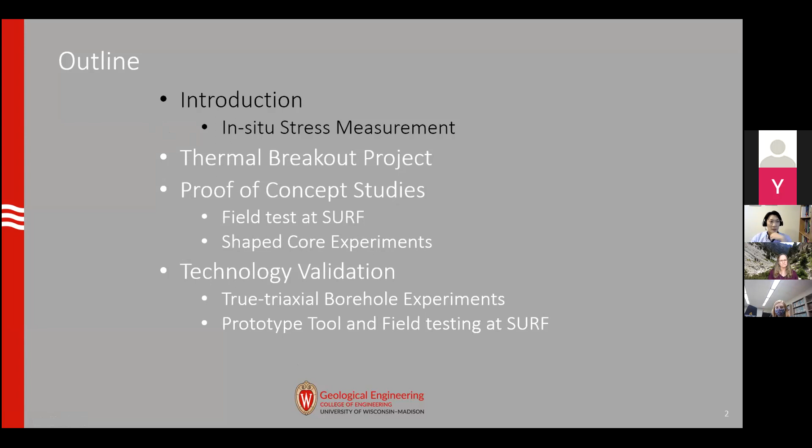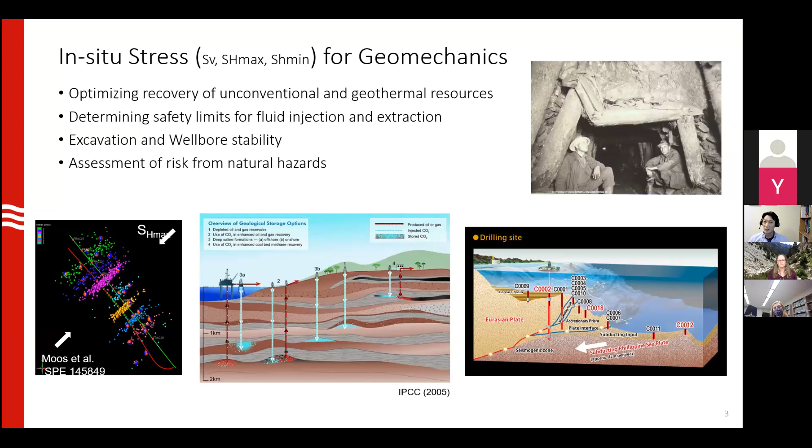Okay, so first, talking about why we care about in-situ stress. I think probably for many of you it's familiar, but just to make sure we're on the same page, understanding in-situ stress is of course very important for geomechanics. If we want to optimize recovery from unconventionals or geothermal, we need to understand when microseismicities or faulting happens and the associated dilatancy. We also need to, if we're trying to store fluids in the earth, like carbon or nuclear waste, understand to what extent we can keep injecting, and that's also governed by stress.

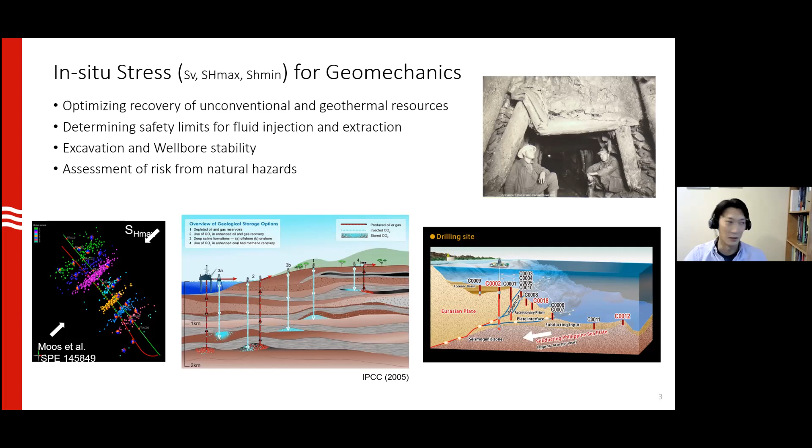More on the shallower side, here's just an example of an interesting photo I found that demonstrates mine stability as an issue. Obviously this one is, well, they're pretty relaxed considering how severe the situation is. But if you want to predict these, you also need to know stress. Also from the larger scale earth science story, we need to understand stress to understand earthquakes that pose hazard risk to us.

So how have we measured stress in the earth? There's many technologies that we've been using. On the left is representing the more geotechnical engineering side, in this list of techniques. For instance, people have put flat jacks in rocks, slots that they cut into the rock.

What they do is they pressurize the rock until they deform back the rock into its original state. Or overcoring is a method where you attach strain gauges or deformation sensors to a rock, and then release the stress surrounding the rock mass, measuring the associated deformation to understand what the stress used to be. So these are all displacement-based measurements to back out the stress. These are kind of limited in the distance that you can achieve.

I'm not sure if you guys see my mouse. Do you see my mouse? Oh okay good. Yeah, so these are kind of limited in the depth range that they can achieve.

So more typical in boreholes that can reach greater depth, people tend to also use hydraulic fracturing. Hydraulic fracturing is a method where you keep injecting water until the rock fractures against the minimum principal stress. You cycle the pressure many times to observe the opening and closing of the fracture in order to understand what pressure was necessary to open these fractures. So that becomes the most direct measurement method we currently have.

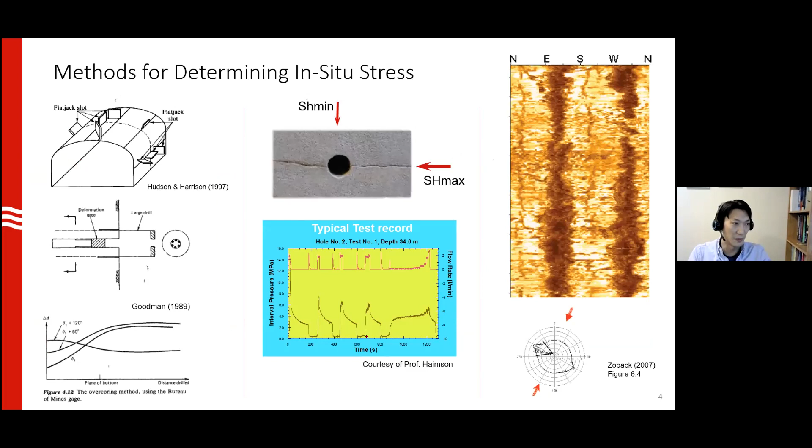The advantage of this technology is that if you combine it with hydraulic fracturing, theoretically you can determine the complete stress tensor. Also, this imaging can be done in deep boreholes, so while civil engineering methods on the left were limited to proximity of excavation, you can access much deeper depths, which is of interest to geological engineering. You can also utilize the width of the breakouts to uniquely define the horizontal stress magnitude.

But there is a limitation to this: breakouts and drilling-induced tensile fractures don't always form. I forgot to mention, but sometimes this sinusoidal pattern can also go down into tension. This is where the breakouts form, whereas if the stress condition is right, you can also create tensile fractures that look like this.

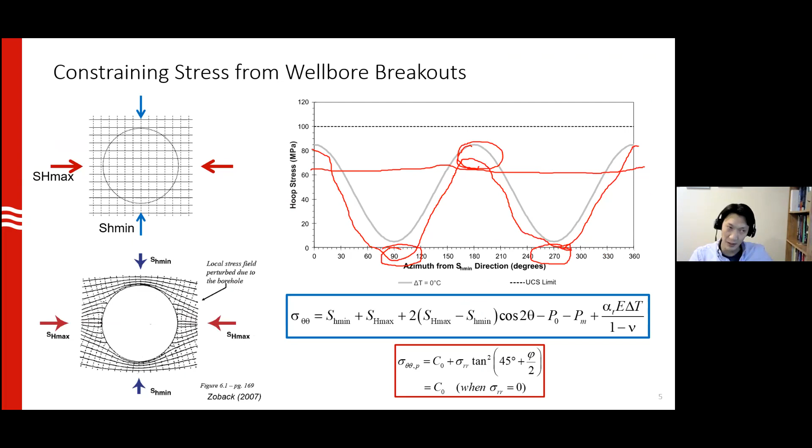We won't focus on that today, but the important thing to note is that you have to have the right stress magnitude - the stress has to be high enough, and also the rock strength has to be low enough, in order to create these features so you can analyze stress. But if the condition isn't right, if the stress is too small and the rock too strong, you won't get these features, as you can see in the middle or bottom section, so you won't get any information about stress.

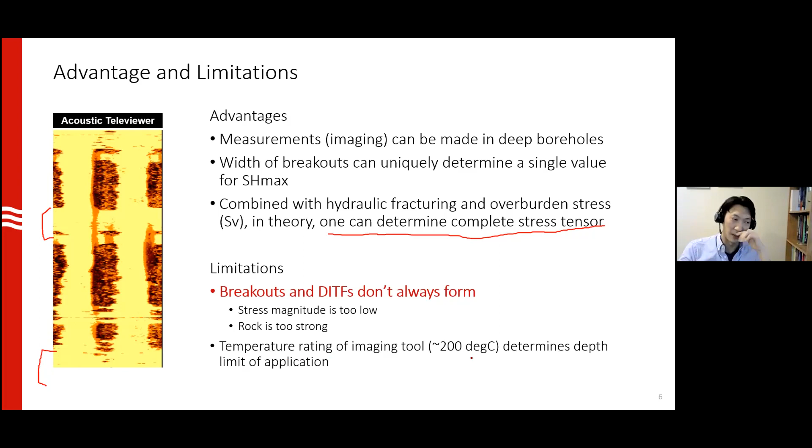The proposed technology aims to overcome these limitations. I also note that these imaging tools have a limited temperature range, which also determines the maximum depth you can do this kind of analysis. So what is the thermal breakout project?

This essentially started from our partner RESPEC's previous project, where they were trying to melt rocks using borehole tools in order to seal a borehole. This is a quite interesting idea. They were developing downhole tools to do in situ melting of rocks. They were successful melting the rock, but they also realized that the heating caused many fractures around the borehole, which you can kind of see by the rough edges here. I think the center portion is the molten rock, whereas the surrounding is the brittle fracture that formed around the borehole.

They noticed that heating induces a significant amount of thermal stress. This led to the idea that maybe you can use this, but for this project it had a detrimental effect because they were trying to seal the borehole, and instead they were introducing fractures around it. So now they thought about using this to intentionally create breakouts.

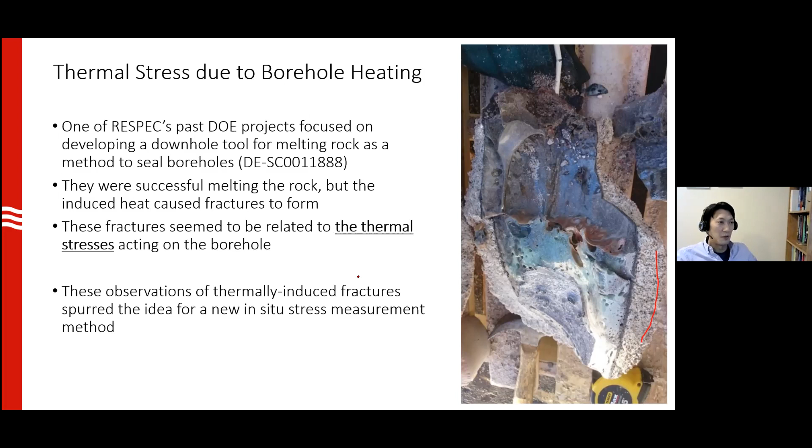So the way the concept works is fairly simple. For instance, the first gray line on the bottom may be the hoop stress variation around the borehole, which does not reach the rock strength. The rock strength limit is shown by this dashed line. But if you heat the borehole and create an additional hoop stress due to the thermoelastic stress, you can raise this entire sinusoidal curve so that the maximum hoop stress reaches this rock strength and therefore create breakouts.

This equation on the top right is the Kirsch solution, which applies for the maximum value of the hoop stress. As you can see, you can relate the amount of hoop stress you get with the amount of temperature, as long as you have the proper thermoelastic properties, elastic moduli, and Poisson's ratio. So this gives us an idea that if we can measure the delta T that is required to create this breakout, we can also back out what the stress magnitudes were that created this sinusoidal curve.

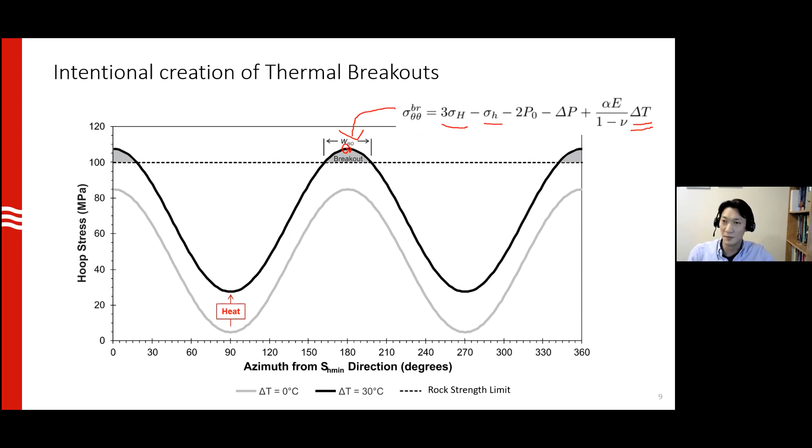I hope this makes sense. Fairly simple: if we don't see breakouts, why don't we cause them ourselves by heating the borehole?

So does this really work? In the project, we had some early experiments and field studies that tried to prove that this idea can work. First is the shaped core experiments, done by Seiji Nakagawa at Lawrence Berkeley National Lab. In this experiment they use a rock sample with a particular geometry with a narrowed center section. I'm sure this is similar to the dog bone shaped experiments you guys have also been doing in the past. But the reason why in this case they do this experiment is not to create tension, but actually intentionally create a stress concentration in the middle that is similar to the curvature of the borehole.

By loading axially, they can cause a simulated hoop stress at the side of the rock. What Seiji also did is they know they can load the rock until failure forms to simulate a breakout. This originally was done by Nakagawa, Ewy and Chevron, where they were trying to simulate a breakout failure by loading the sample axially. So what Seiji did is he loaded the sample, putting some axial stress, but not enough to create the breakout, and then spot heated the surface of the rock to simulate the thermal stress we are trying to create in a borehole.

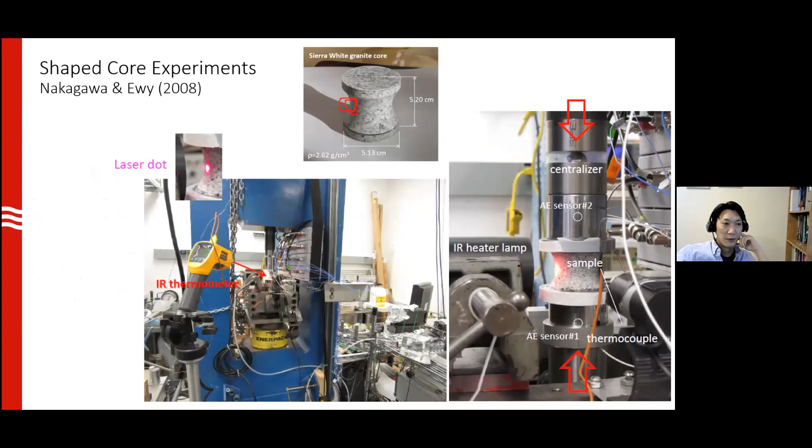He also has AE sensors embedded in the piston so they can monitor the activity. This is a summary of what happens in the experiment. Red shows the axial stress increased in steps, and the background red shading is the timing when heating by the infrared heater lamp is occurring. So basically increasing the axial stress is like increasing the hoop stress. What you can see is that when the axial stress is low, heating does not cause anything because you don't see any acoustic emission occurring.

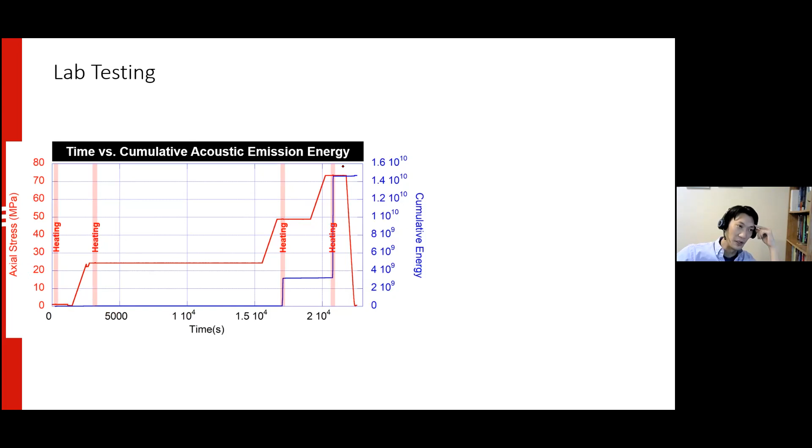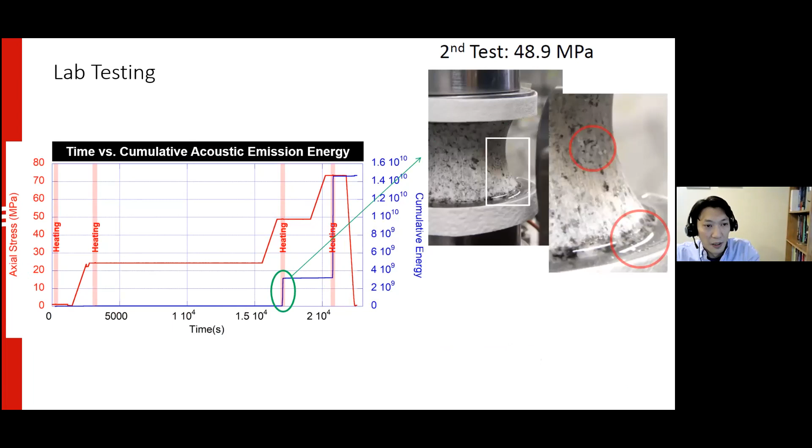But once the axial stress reaches a certain level, heating does cause failure analogous to a breakout and associated acoustic emission. In test 2, you can see this simulated breakout happening and spalling of rocks accumulating on the bottom. So what this proves is a proof of concept that heating-induced rock failure is a function of the background stress level. Identifying the amount of heating required to cause this becomes a measure of stress, or we can infer what the stress magnitude is. So occurrence of compressional failure due to heating is controlled by background stress.

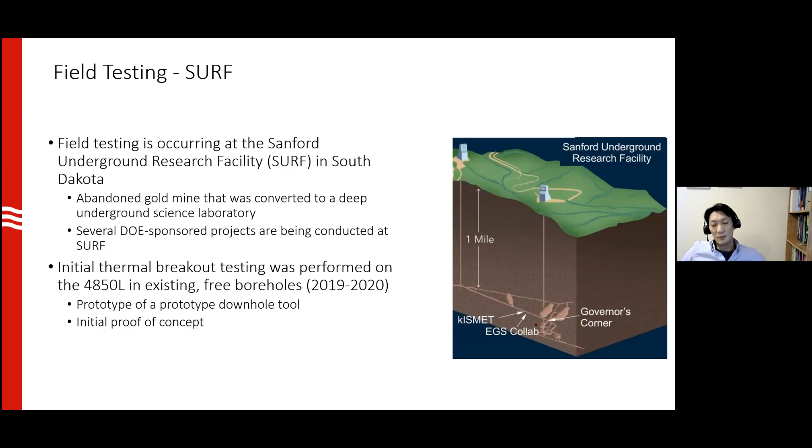So our colleagues at RESPEC also tried to do a proof of concept study in an underground laboratory, namely in Sanford Underground Research Facility. This is an abandoned gold mine that is now extensively used for many underground laboratory experiments. In recent years, there was a kISMET project that tried to do hydraulic fracturing in this mine, and right now there's an ongoing EGS Collab project, aimed at creating hydraulic fractures under in-situ conditions for geothermal energy studies.

So this is what the 3D structure looks like. You can see that it's quite extensive, and the region where they're doing the test is the orange spot you can see on the bottom.

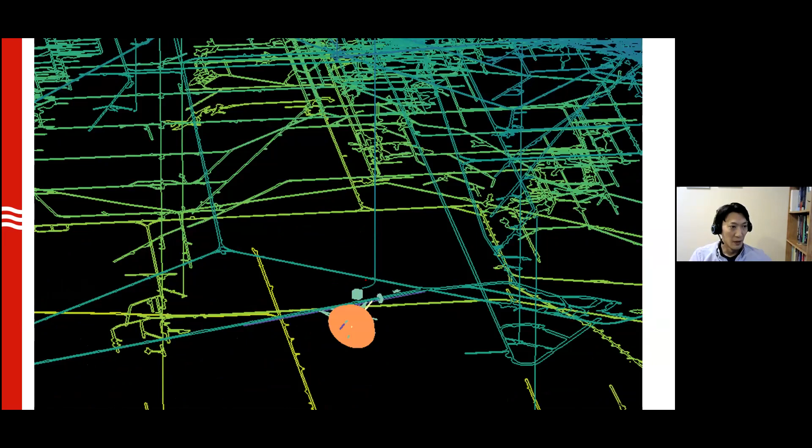And this is what the site looks like. The advantage of this location was that, some of you might remember, this is actually where the DUSEL project was proposed maybe 10 to 20 years ago. They were trying to create an underground laboratory there for geotechnical engineering, so there were actually boreholes already existing. We could take advantage of that and try to test the concept.

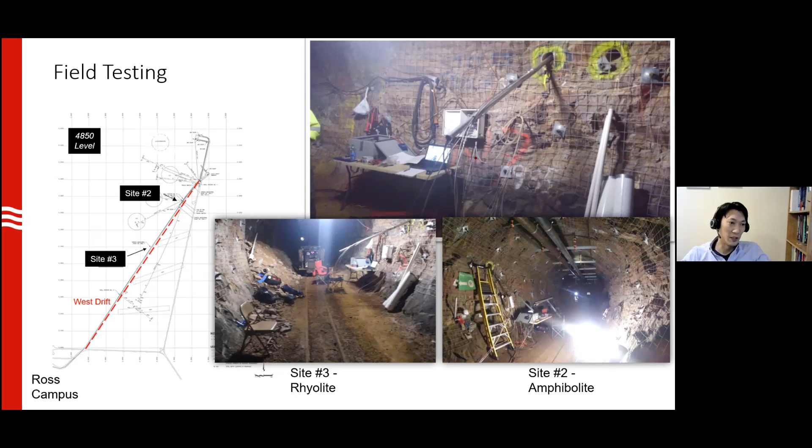So what the colleagues at RESPEC did, they call it a 'garage science tool,' and it's very simple. They just have a heater in the middle and several additional components to stabilize it, and they stick this in the borehole to see when the breakout occurs, and also monitor the temperature. The heater element temperature reaches about 1000 degrees, and then the radiation heats the rock, and the rock temperature is also rising slowly over time.

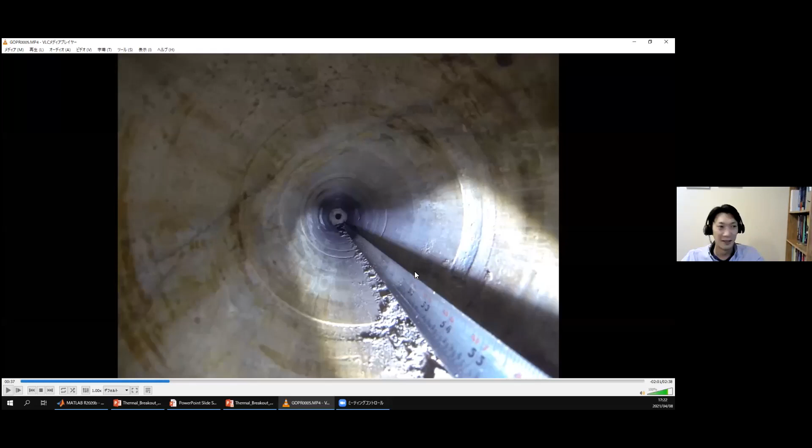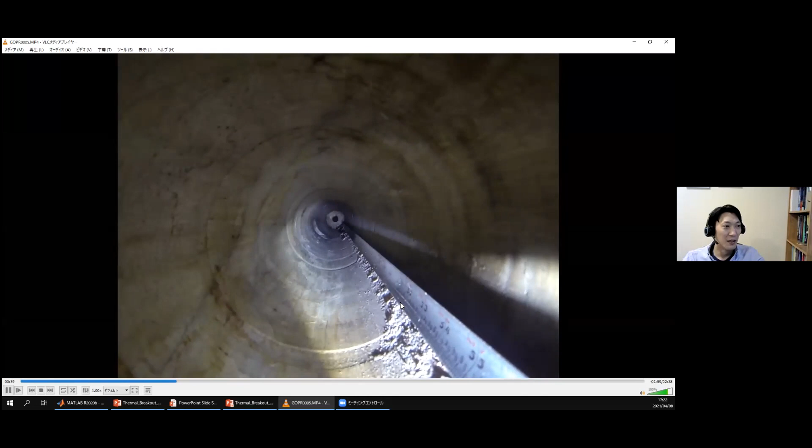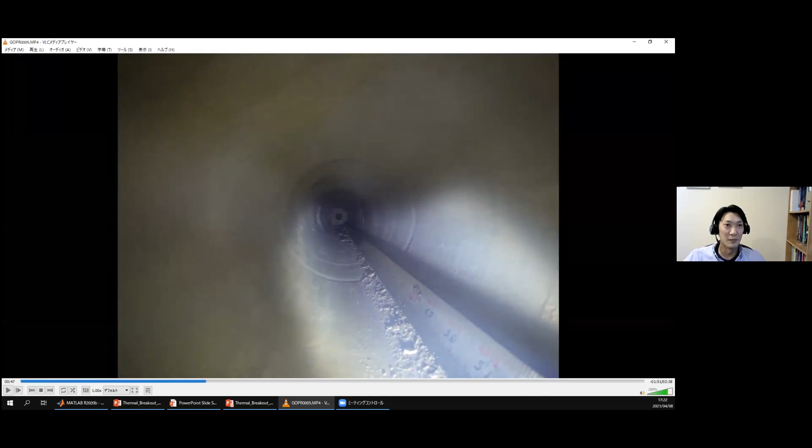But what you can see here is that on the side of the borehole it actually created a breakout. The stresses are... it's now rotating, and it becomes foggy, like this. But quite interesting. So this shows that this idea that thermally induced stress causes breakout does actually work.

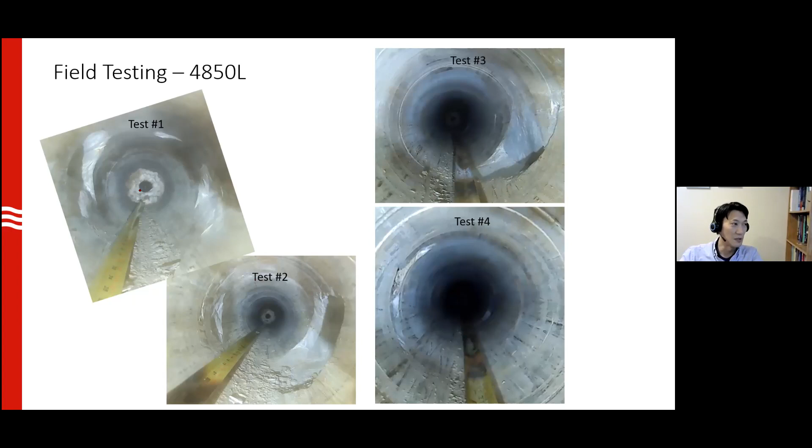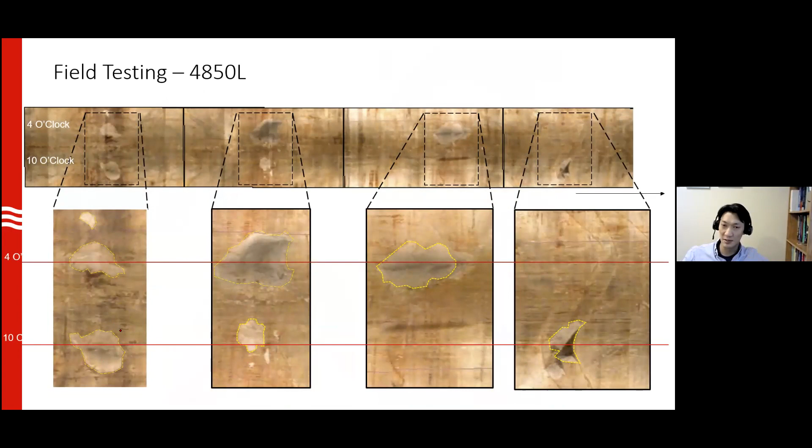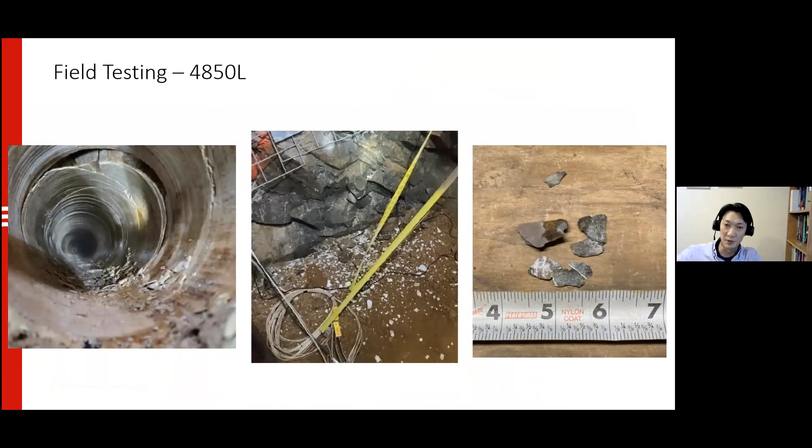So this is four locations that they tested. You can see diametrically opposing breakouts forming in the 4 o'clock and 10 o'clock direction. This means that these are indeed breakouts as we expect, as we see in typical boreholes. We can also see rock chips falling, similar to what is produced in boreholes where breakouts occur.

Okay, so now I want to get into some laboratory experiments that we actually did at UW-Madison. We proved that this can actually happen conceptually, it works. But whether we can use it as a stress measurement tool is a whole other story, because you have to achieve enough precision to call it a stress measurement tool. The experiment was carried out by our postdoc, Maciej Trzeciak.

The samples are quite big, 5.5 by 8-inch prisms, and we use Niagara dolomite and Berea sandstone to do these tests. We also have acoustic emission sensors embedded in the platen so we can hear the rocks break, and also in the heated tests, thermocouples are embedded so we can monitor the temperature.

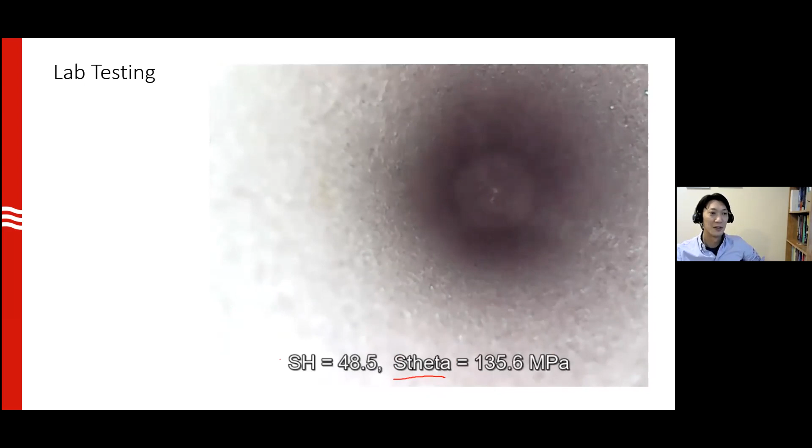It's supposed to happen pretty soon. You can already see rock fragments piling up on the bottom. Sorry, I don't have the timing memorized. Now you see a lot more falling down, and you can start to see the surface changing morphology due to the breakout formation.

All right. I don't see a progress bar where I can control this. I'm sorry, okay.

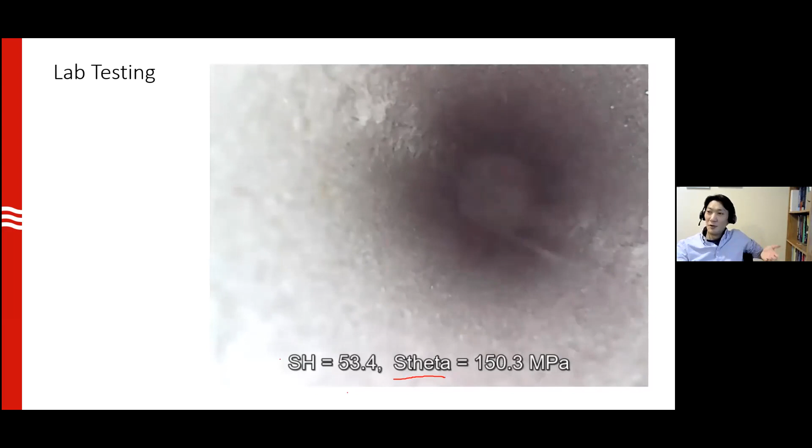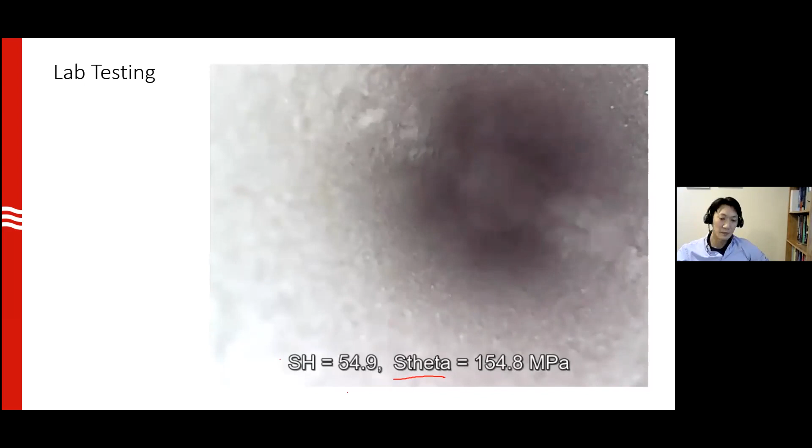So what you might notice is, when do you know the breakout happened? Because it's not like all of a sudden the whole thing collapses. It's quite subtle: you start by these grains plucking out, gradually the pieces get larger, and gradually you start to see this borehole surface changing. Sorry.

We had quite a bit of discussion on how to use acoustic emission to identify the onset of breakout. The acoustic emissions locate fairly nicely, as we expected. It forms where the breakout should happen.

I won't get into too much detail today, but essentially we noticed we can classify the acoustic emission into source types: C for compressive, S for shear, T for tensile events. It's really the onset of the tensile events, signifying the splitting open of the rock fragments, that corresponds with the onset of breakout.

I can talk about this more in detail if interested, but in essence, that is what we rely on right now to identify onset of breakout.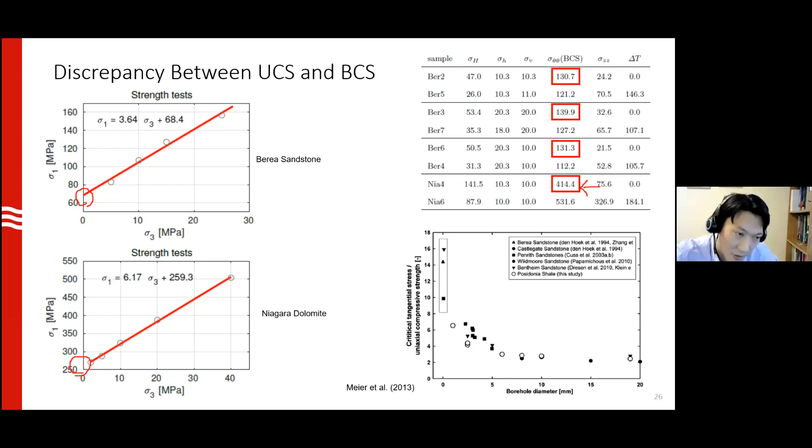It has been determined and understood that the strength of borehole walls becomes stronger as the borehole gets smaller. You can understand this as a typical size effect that's empirically known. Some have also tried to use fracture mechanics to explain this, but the essence is that even for boreholes that are 2 centimeters in diameter, the critical tangential stress—the hoop stress at failure divided by the uniaxial compressive strength—can reach about a factor of 2.

So we are not 100% comfortable with this discrepancy, but at least we can say this is a known effect, and we can understand that these numbers we recover from the experiments represent the strength of the borehole. We can apply this number when we do a heated experiment.

So how does a heated experiment work? Very much the same as the previous room temperature experiment, except that we don't keep increasing. Let me get rid of this zoom panel.

We don't keep increasing sigma h. We stop increasing it here, because we want to induce a breakout by heating rather than just external stress. So after we keep the maximum horizontal stress at a constant level, now we start heating the borehole, and this is the temperature data registered by the thermocouples we have.

So the summary from this lab testing is that phenomenologically, we are successful in creating this thermal breakout, and we have first order success in inferring what the far field SHmax magnitude is. But there are certainly effects that we are not totally comfortable with yet. One is the size effect, which we could only address empirically. And also the fact that this true triaxial criterion that we constrain from cylindrical samples does not really apply to the borehole geometry.

Applying true triaxial criterion to borehole, we're definitely not the first ones to do it. It's been studied for decades, but most of the time they use it in terms of identifying the safety limits in drilling, whereas we are actually trying to precisely determine the stress. And it turns out, I think it's fair to say that we don't have good enough knowledge about rock strength in order to make the reverse happen of estimating stress from borehole deformation.

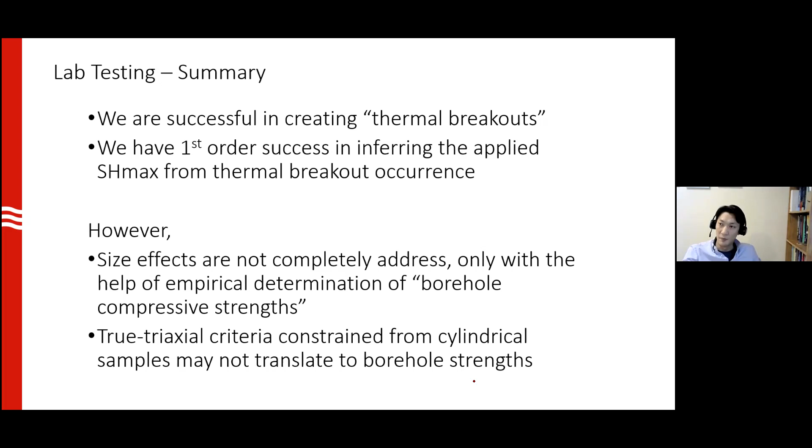Finally, I just want to mention some ongoing things. As I mentioned, we are in year 3 of the project. What our colleagues in RESPEC called the garage science tool actually works quite great in producing field thermal breakouts.

But we're actually also, with the help of Integrity In-situ, designing a prototype tool, which is a little bit more refined, with better temperature measurement, better temperature control capability, and also in-situ acoustic monitoring, so that we can identify the onset of breakout in the field. So that is designed and I think underway in construction.

And we hope to take this to the SURF Underground Laboratory again to test our concepts. Particularly, we're going to go to a little bit shallower level. The 4850 level is now occupied by the Fermilab, which is trying to shoot neutrinos from Chicago to South Dakota and detect it in the underground lab. So that's a major project going on there. So we are now kind of kicked out of the 4850 level, and we are at the 4100 level.

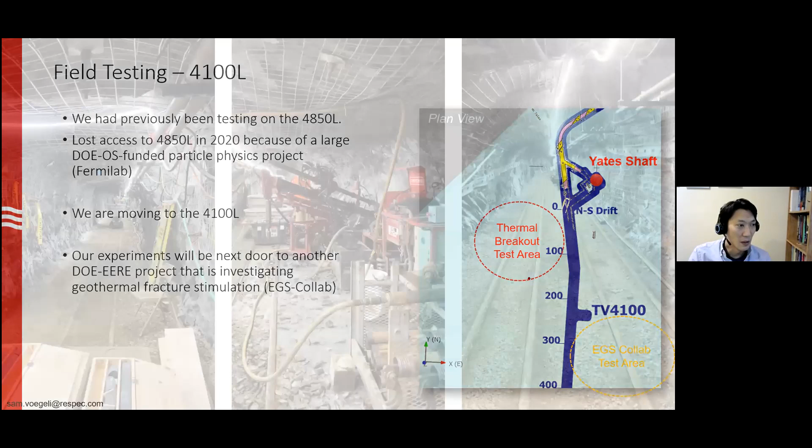It's a slightly more tight spacing, but the drilling equipment can still fit. So, whoops. Sorry, I didn't know that there was a movie here. Let me keep going.

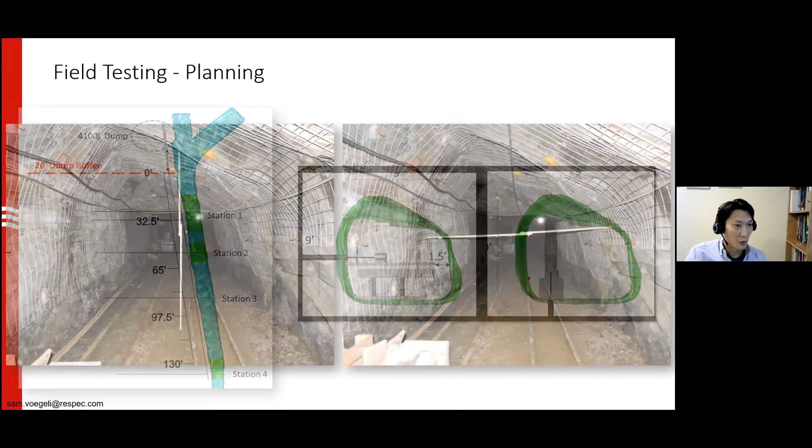But what we will be doing is drilling vertical and horizontal wells as well as a diagonal hole, because the borehole that's not oriented with the principal stress gives us some information about how the breakout occurrence tells us the ratio of the principal stresses. Probably shouldn't get into too much detail on that right now, but that's the activity that's going to take place hopefully within the next half year, I think, so we can test this method of creating thermal breakouts and inferring stress from this new field tool.

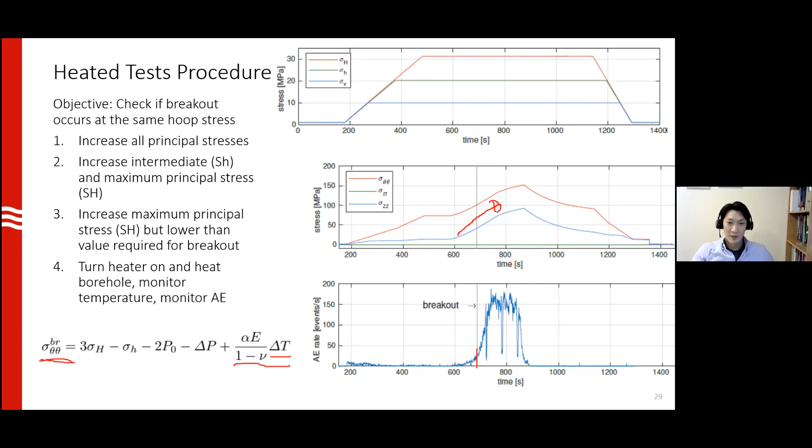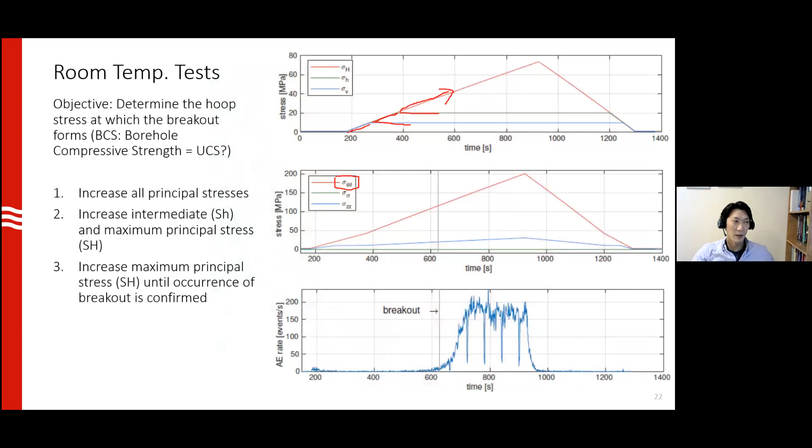Yes, I didn't explain that, you're right. Well, it was basically a nichrome heater element, where you just apply voltage. We just put this heater inside the borehole and apply a constant voltage, and the temperature of the heater increases, and then the radiation also increases. So most of the heating is done by radiation, actually.

Okay, yeah, okay. And I had some question, but okay, no, I think that's the main question. And then I had some question about the stage's result - I was just a little confused, but I think you have acoustic emission only during the heating time, am I right?

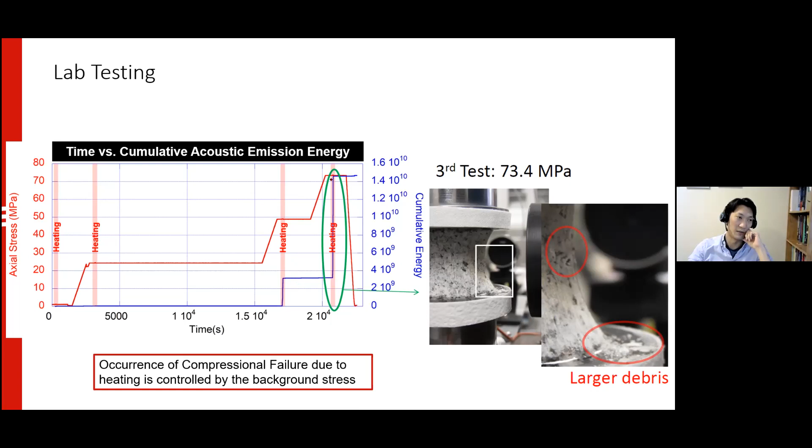Now I understand that. So another thing - yes, I don't remember if he has... well, I think he has the temperature measurement too. And most likely the second time he sees acoustic emission, that occurs at a lower temperature, I think. That's not expressed in this graph, but yeah.

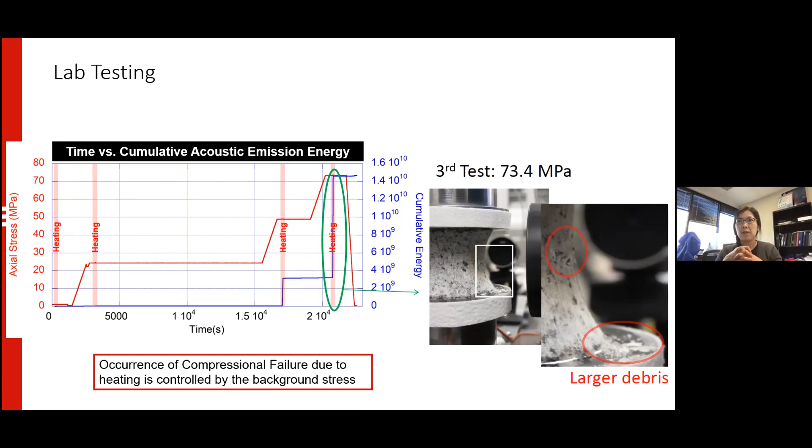Now I remember my second question about your lab settings. So your measurement of the horizontal stress, or you have basically the polyaxial applied load - so once you start heating up, are you still trying to keep the load constant? Yes, it's stress controlled. So basically the macroscopic stress is constant. Yes, I forgot to mention, but there's a servo intensifier on the backside around here, and that's controlling the stresses constant. All right, thanks.

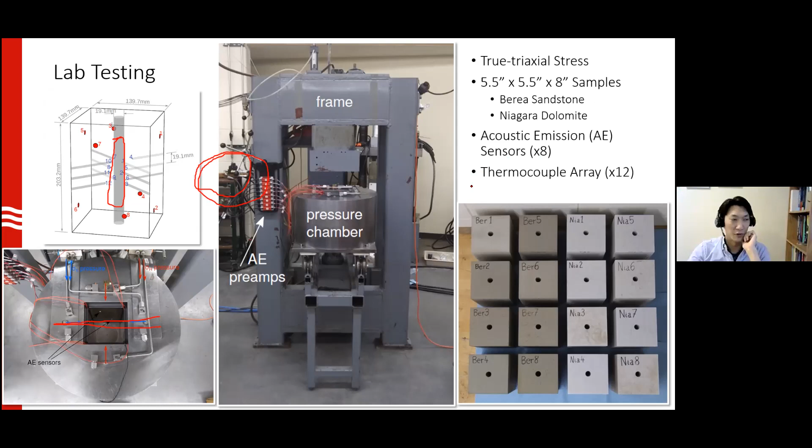Yeah, I have a question. Hi Hiroki, enjoyed your talk. Thanks for that. I actually have two questions, but one is if you would speak about the duration of heating and heat diffusion into the rock, and if you take that into account in terms of your analyses - in the True-triaxial experiments. Yeah, sure.

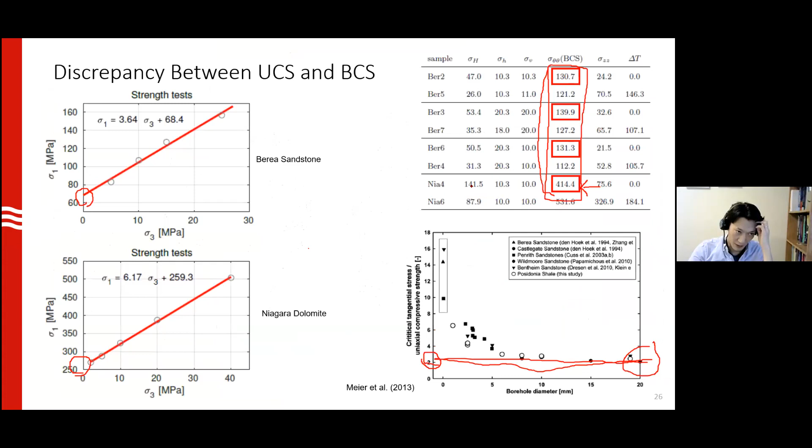Where do I... oh yeah, we got to go to the heating experiments. I mean, I'll just be more specific - the temperature in these equations is assumed to be homogeneous, and how close do you get to a homogeneous temperature distribution in the sample?

Actually, we are solving the diffusion problem, so the delta T is the temperature at the surface of the borehole wall. There's some literature on why that's the only temperature that matters - there's Voigt and Stevens, I forgot the year, but they do a very detailed analysis of how the thermal stress is only dependent on the surface temperature. So our goal is to extrapolate and understand what the temperature is at the borehole.

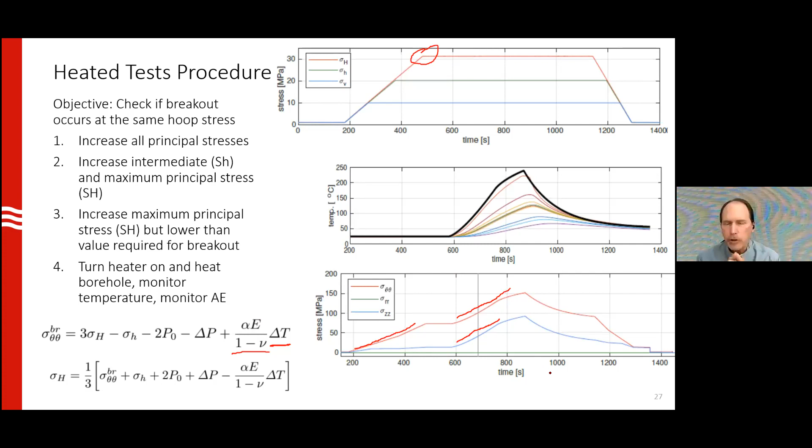So because the intermediate stress is increasing, that's also most likely increasing the rock strength. That tells us that using UCS is not appropriate. So you take all that into account in predicting and checking failure strength? That's right, so we tried, but it still does not work so well. Yeah, I get you. Right, so we teach about rock strength, and Mohr-Coulomb takes you quite a ways to predict many things, but through this project, I just learned how little we know about rock strength.

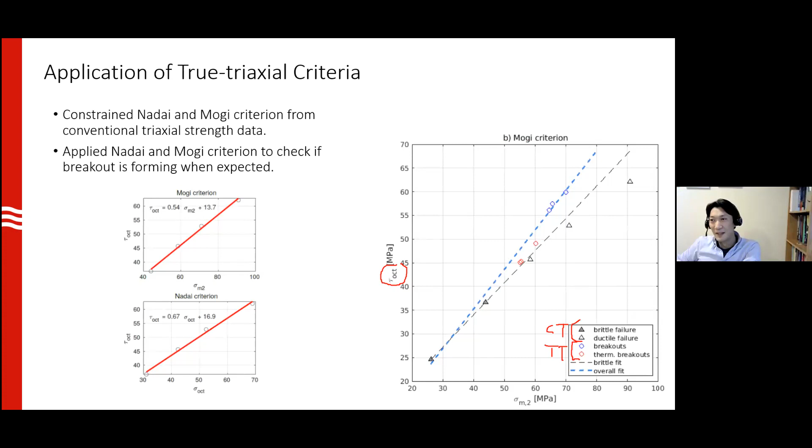Yeah, that's true. I have one other question, and that was about your acoustic emissions - can you look at magnitude or frequency of the emissions to distinguish between microscopic fractures and larger fractures that lead to spalling, or shear fractures, in the sense of what happens in the natural borehole? Is that possible, or are they all pretty much the same magnitude AE?

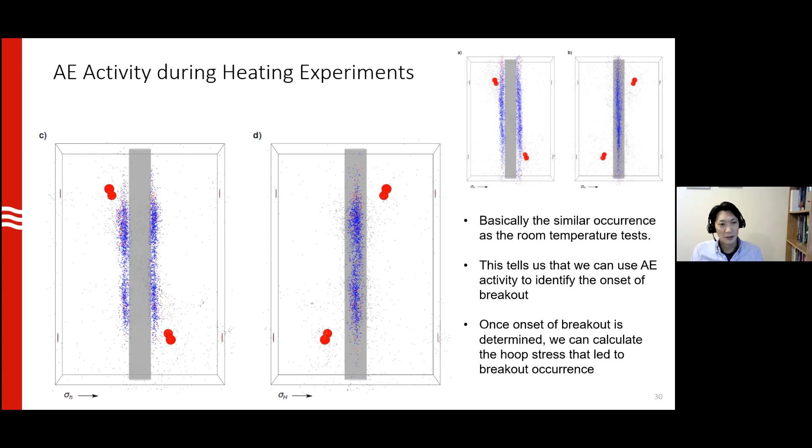Yes, we tried to do that. We also looked at how the B value changes, the percentage fraction of opening versus shear, and also magnitude, as you said. But the information that gives us the most sharp increase in the signal is really the cumulative energy. Maybe we're not trying hard enough, but I guess the short answer is it was difficult - we tried, but it was difficult. And especially this Berea sandstone produces the most acoustic emission. The other dolomite I didn't talk about today actually did not give us so many acoustic emissions, so that made it quite challenging.

No, I acknowledge the great difficulty. These are not simple experiments. I know they take a lot of work, and it's really impressive.

It's really nice. I guess I'll ask one more brief question, about borehole stress measurements. We often just assume an Andersonian stress model. But in this case, if you can get this to work well, you could drill boreholes at different orientations and try to get the true principal stresses, rather than just the vertical and horizontal stresses. I know in many cases the vertical and horizontal stresses are the principal stresses, but that's not always the case, right? Yes, you're absolutely right.

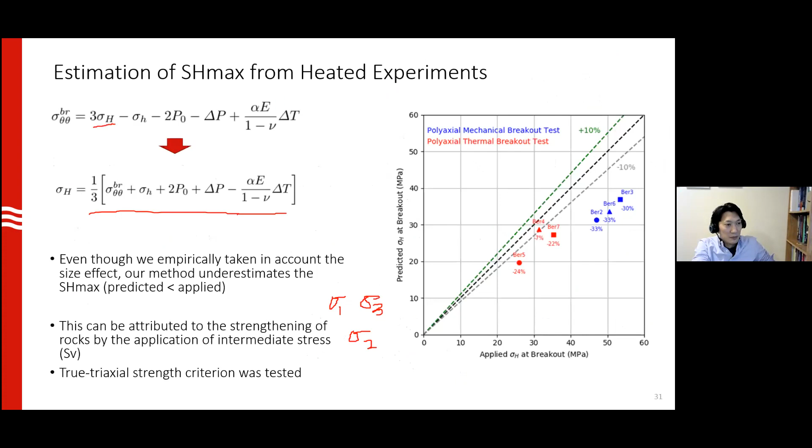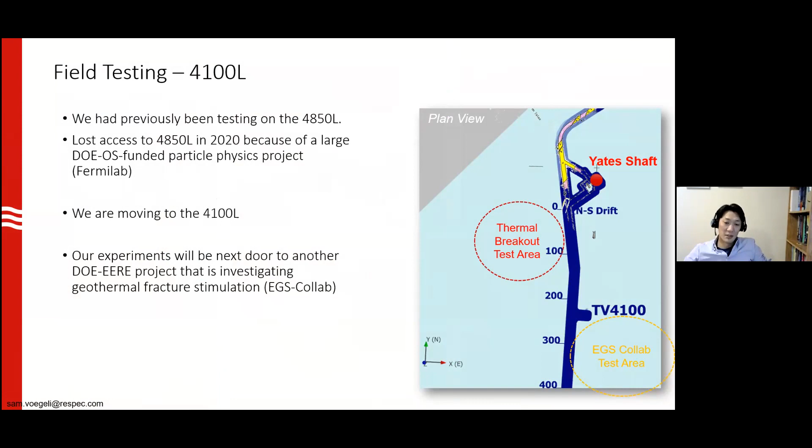In fact, let me try to get there. Some results from the EGS Collab may suggest that the vertical stress is inclined. So those are things we might be able to address by looking at this. Sorry, it takes a while to get there.

Yeah, so we're actually precisely trying to calculate what orientation would give us the most information about the orientation and the ratio of vertical to SHmax. Dan Moos, from GMI, has helped us quite a bit getting this analysis right.

Yeah, that's great. Yeah, thank you. Thanks.

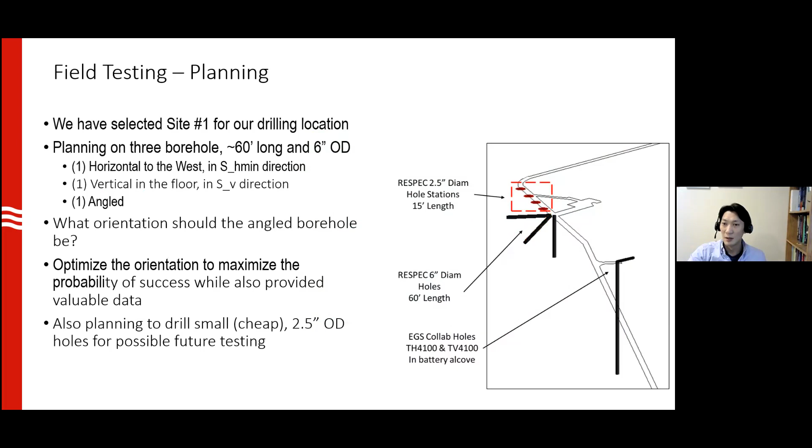All right, there was one more question in the chat from Deborah Martogi, asking if you had considered relating the number of AE counts to characterize the development of the fractures. For example, is there any unique AE character when large fragments are observed?

Yes. Let me get to that slide.

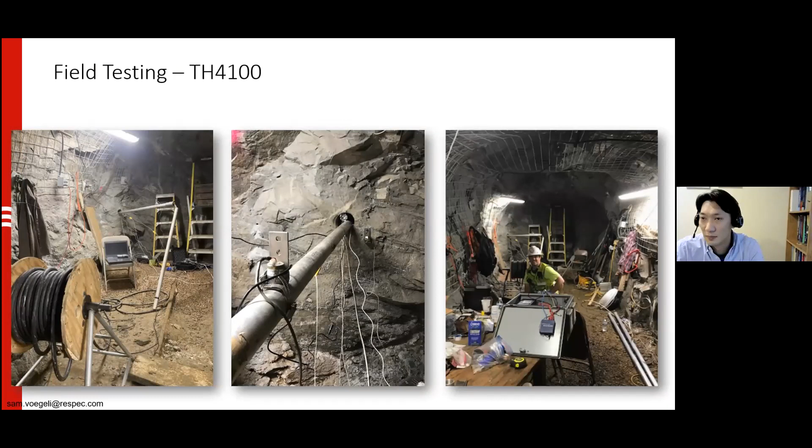Here you go. We were really trying to do a lot of advanced analysis with AEs to help identify when this breakout happens, as you said. So far, the best information we've got is when you separate acoustic emission into a compression type, a shear, or an expansion, a tensile event.